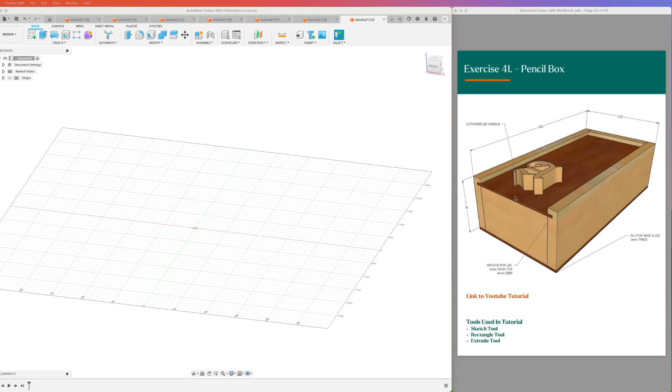Okay, for our box here, we've got two sides the same, so we can just draw one of those sides and duplicate it. And then we have our two ends that are different, so I need to draw both of them. We need to draw our base on, we need to draw our lid in, and we need to add in our handle as well.

So let's start by drawing one of our sides. I'm just going to draw my side here. It's going to be 70 tall and 250 long. Finish my sketch, and I'm going to extrude him because I'm going to use the lid later to create my slot. Now I'm going to assume everything is 12 mil thick here, except for my lid and my base. We're going to use 3 millimeters thick.

So there's one side there. If I go into my bodies, I'm going to right click and say move or copy. I'm going to be on free move, create a copy. I'm just going to drag him across here. So I now have my two sides.

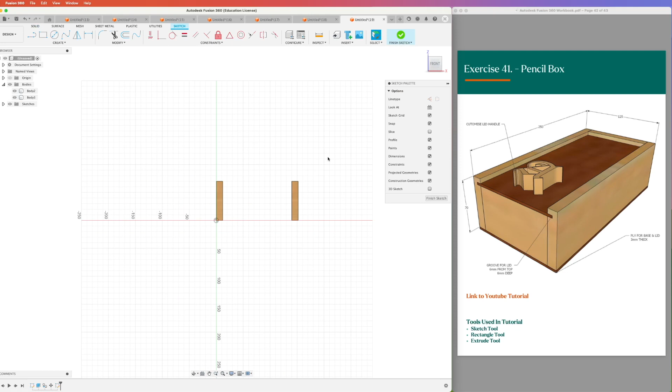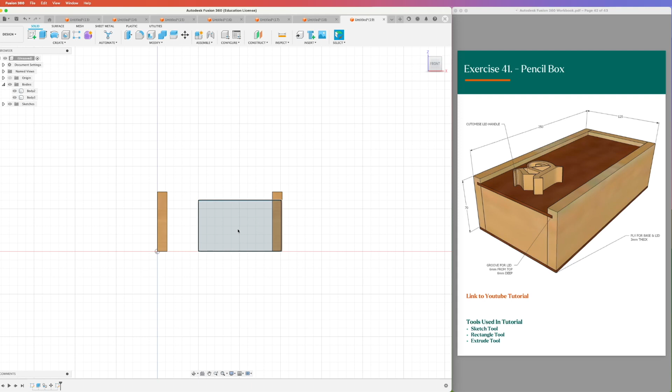I'm going to jump into this plane here, and I'm going to draw my first end piece. So my first end piece is going to need to be, let's say that he's going to be 60 high. And then he needs to be 125 minus 12 minus 12, because we've said the sides, we're going to make them 12. We'll finish that sketch. We'll extrude him out, and we'll extrude him out 12 millimeters.

Now, just be careful here. He's automatically gone into a cut because he's overlapping this other piece. So go back in, and we want to say new body instead. And there he is there.

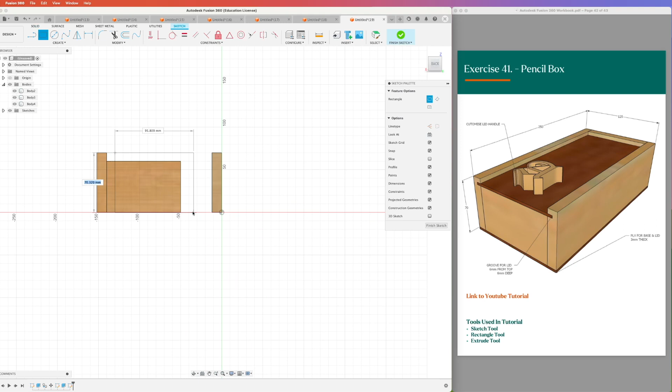I'm going to jump down this end. I'm just going to draw my sketch off this plane. Same deal down here. I'm just going to go 70 tall for this other end, and then it's 125 minus 12 minus 12. There is my piece there, and I can extrude him out 12 millimeters, and there we have all of our outside pieces. So we can assemble these together and then draw on our base and draw on our lid if we'd like.

So let's right click and go create component, create component, create component, and create component. So there's all four of my pieces, and then we can assemble this together.

So spin him around. I'm going to choose this front piece, which is this one that's highlighted. I'm going to right click him and say ground, so he can stay in that spot. And then we can move the rest out, and we're going to assemble these together.

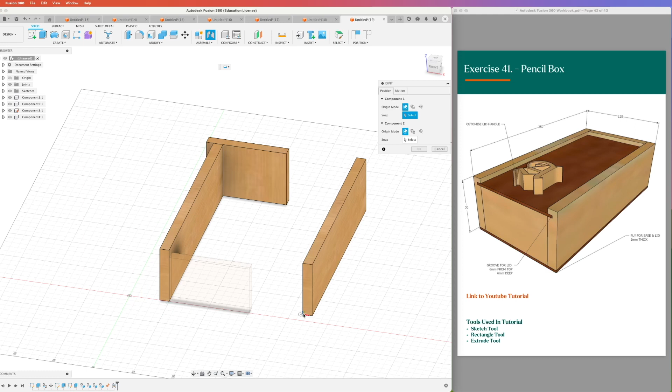So we're going to go for a joint, and we're going to choose the bottom corner for these two. I'm going to choose the same over here, the bottom outside corner. And then at the back here, I'm going to choose the top corner. Except I've chosen the inside one when I need the outside one.

So let's cancel that one and cancel that one. I'm going to choose the outside corner to that corner there, and it should come on the inside of those pieces. I don't need to join this final corner because it's all locked in. So there is our box so far.

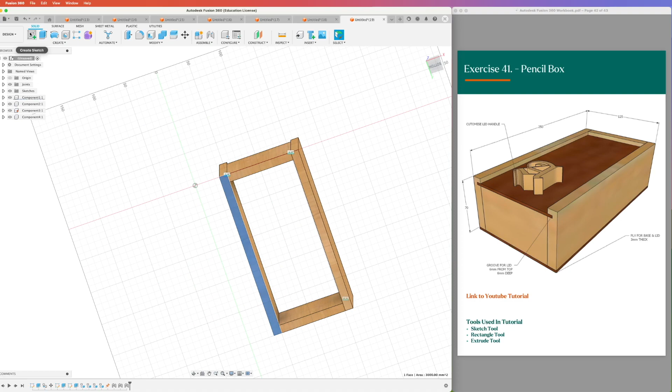We can then go and add on our base. So let's jump down here. I'm going to sketch off the bottom face, and I'm going to create my base. Now it's not going to lock in properly, so I'm actually going to draw it off, and then I'm going to dimension it. So it's 125 and it's 250, so that it's exactly right.

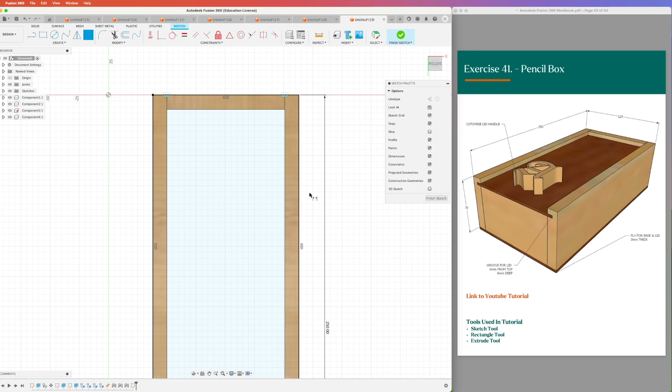I'm going to finish my sketch, and then I can extrude that, but just be careful. You might have to select everything. 3 millimeters. And there is my base.

Now you'll see that it's joined itself onto this piece. So go back into it. We actually want to make a new body. So it's a separate piece. And then it's going to be sitting in here as well.

So now you notice when I've drawn that, it's actually put it under component number 1. So what I'm going to do is I'm going to actually drag it out to my unsaved section here, so it's sitting separately. And I'm going to right click and say create component. I'm going to have another component.

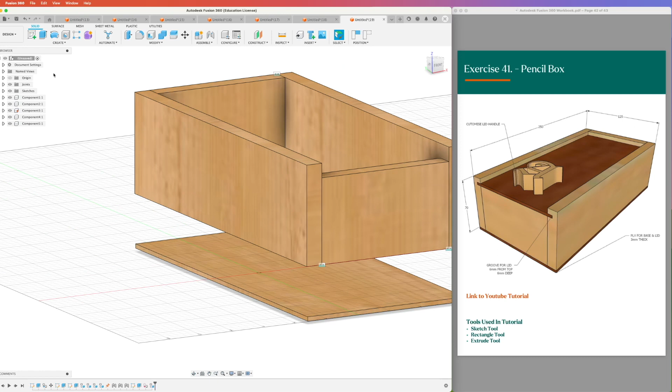So that component sitting on the base there, it can now move around. So we don't really want that. We actually want to join them together still. So we need to go joint now that it's a component. And we're going to choose, let's just choose the outside corner here, because he can match to this outside corner here and join on nicely. So there is our base.

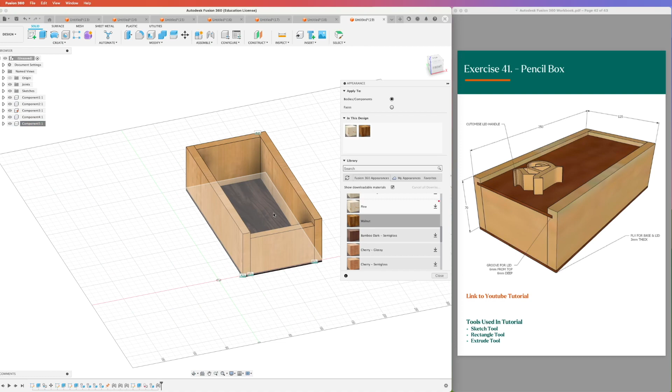And while we're here, we should change the color so it matches our diagram. Nice dark color. We then need to draw in our lid.

So we're going to grab our lid, and I might even just draw it over here to show you that we can draw it anywhere we'd like. So we're going to come across, it's going to be 3 mil thick, and it's going to be 125. And this time I'm just going to say minus 6 minus 6.

Why minus 6? Because that gives us a little bit more room to move in here. So groove for lid is 6 millimeters from the top and 6 millimeters deep. So sorry, it needs to be 6 millimeters deep. So it's 125 minus 12 plus 6 plus 6. And that should give us our groove.

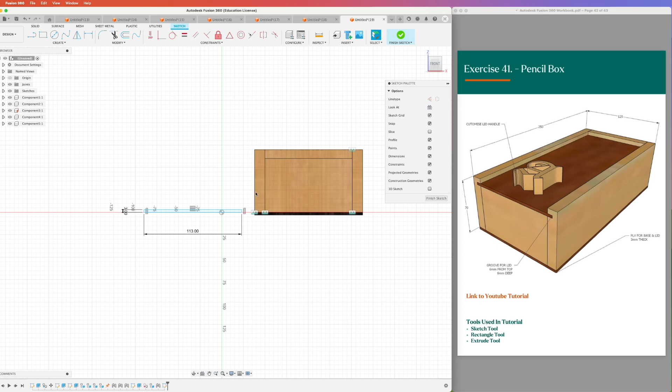So if I extrude this one out, the length of this is not going to be 250 because it's 250 minus 6, because remember our slot at the end, there's going to be a slot in this piece, is also 6 millimeters. So I have to take off our 6 as well.

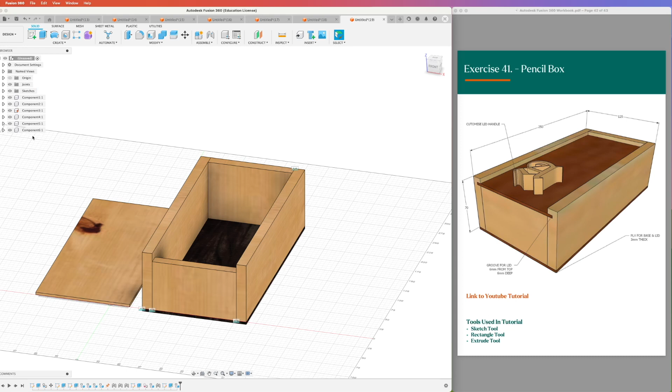So there's our body. I'm going to right click on our body and create a component. I'm then going to find that component, right click and choose appearance, and change the appearance to my darker wood. And then I just need to join my lid in. I've made it a component, so now I can join it in.

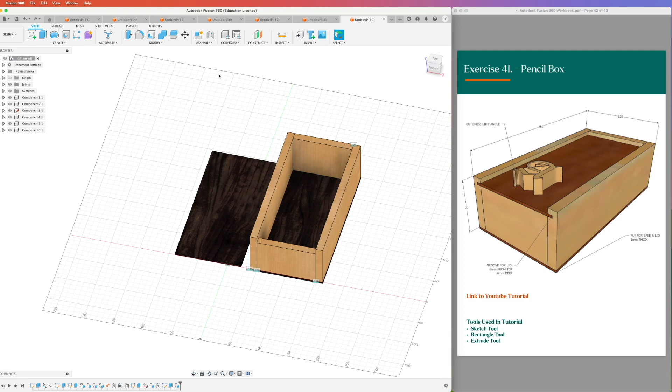Now, when I join this in, I'm actually going to use a slightly different joint. I'm going to grab my joint and assemble this lid. So I'm going to jump under to the bottom edge in the middle, my red facing up, and then I'm going to join that one to the middle of this piece with red facing up. And there's my lid.

Now it's currently a rigid joint, which means it doesn't move around. So if I click OK, it's stuck there, it won't move. If I go back into my joint, I can go to the motion tab and change it to have motion. So I'm going to go slider.

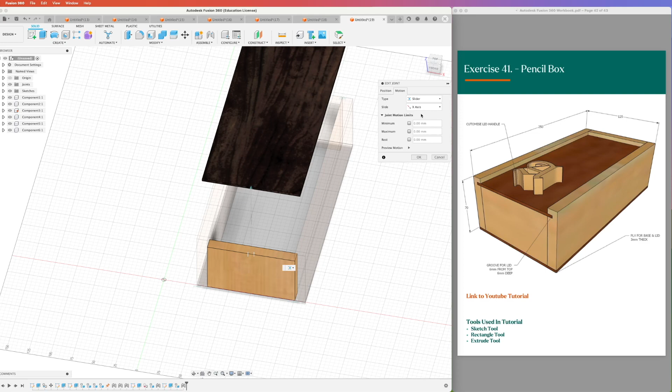Now I don't want to slide that way, so I need to change my axes. X is up and down, so it's not that one. So I'm going to go to Y, that's the one I want to slide.

Now I need to figure out where I want it to slide. So my motion limits is how far and where it can slide. If I go and put in 50, it's going to go that way. Now I want it to actually go the other way, so I'm going to go minus 275 because my box is 250. So I want it to come out from the front a little bit. My maximum it's going to move is 50 and my rest is 50.

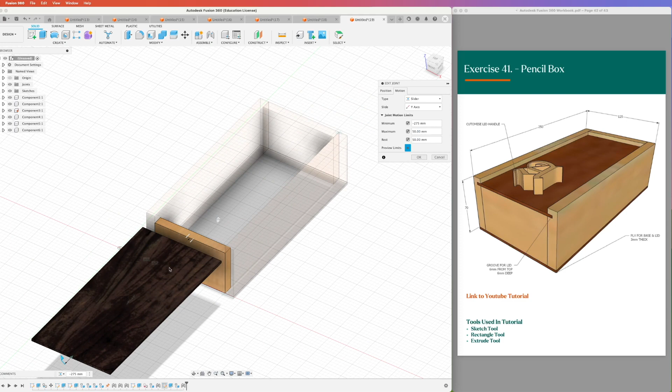So what does all of that mean? If I click preview limit, you'll see it comes out 275, it goes that way 50, and the rest is at 50.

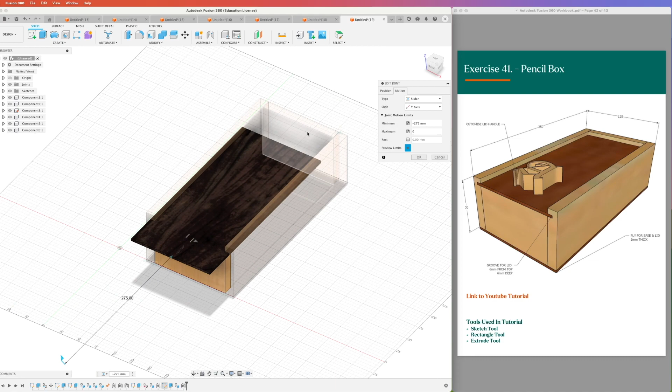So I'm going to go to 0 and leave my rest point as well. I'm going to preview that and it's coming out 275 and going into 0. So it only comes out this one direction from where it's been joined on, because we don't want it to go anywhere that way. I can click OK. So now with my mouse, I can literally drag my lid in and out and it will only go to where we've told it to and it won't go any further, which is pretty cool.

So the last thing we then need to do is cut out our slots and combine them with our tools so we have slots in our pieces, and then add our custom handle.

So to cut out our slots, we grab our combine tool. We're going to target this piece using this piece, click OK. Do the same again with our end piece using our lid. Just remember we've got to have it on cut and we're keeping our tool. And so now if I just rotate around, when I pull my lid out, you'll see where the slot is in my box, which is pretty cool.

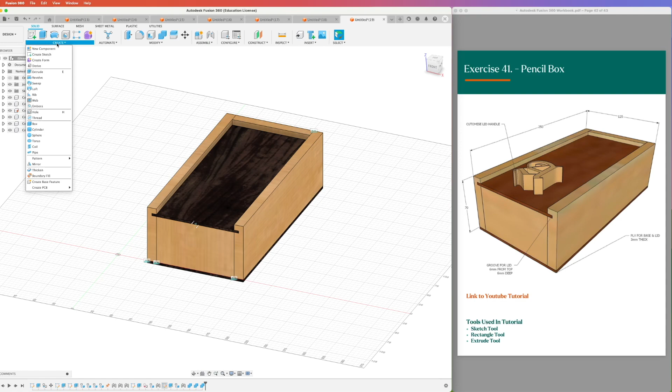I can then add my handle. It can be anything you like, but I'm just going to use some text as well. So let's sketch off our lid here. Create, going to go down to text. I'm going to just click on my box here and type in.

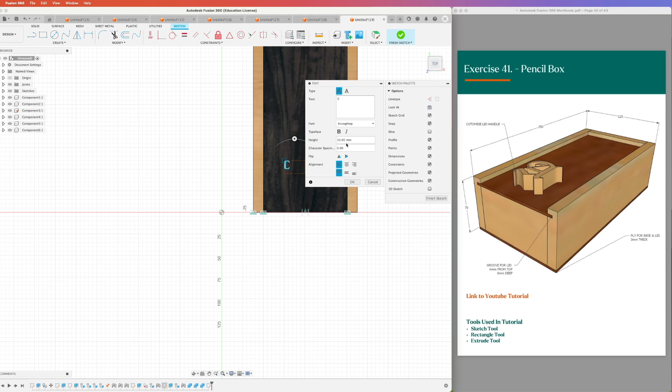C for Crofts. I'm going to choose a font somewhere in here. Let's go with good old Krungthep, sounds fun. I'm going to make him 50 high, click OK, and then I can move him to here. Finish my sketch, then I can extrude him up.

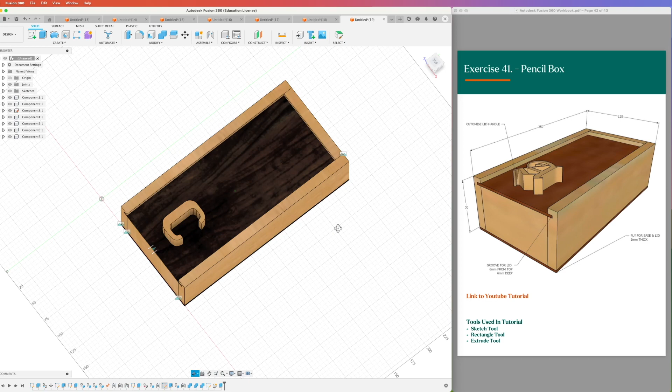25. I'm going to create a new component this time. And there's my custom letter lid, which is pretty cool. And then when I drag him now, that C isn't actually attached.

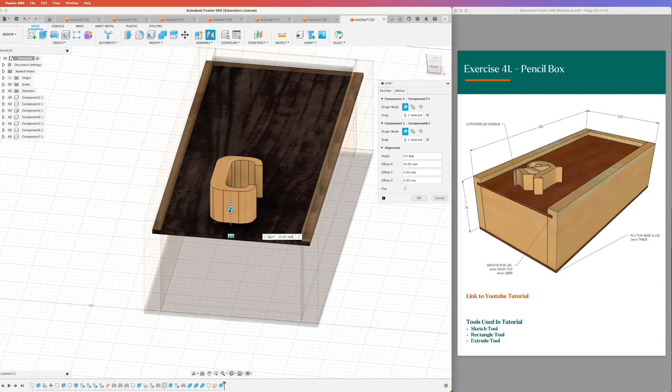So let's jump into here and let's join him on to here. So we need to grab something. Let's grab the middle of this edge and let's join him onto the middle of this edge. But then we're going to give him a distance, so not up, so it's not that arrow, it's actually that arrow back there. So let's just put him back to 30.

I'm going to rotate around. I'm going to grab the right arrow and somewhere about there looks all right. And so now when we move our lid, our handle comes with us as well, which is pretty cool.

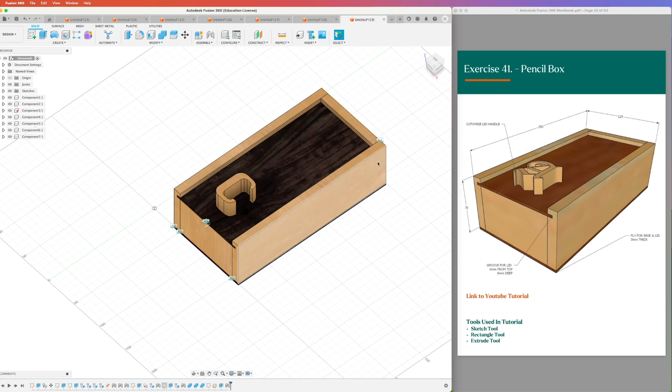And that's how we can draw a pencil box with all of our separate parts and have movement in it as well.